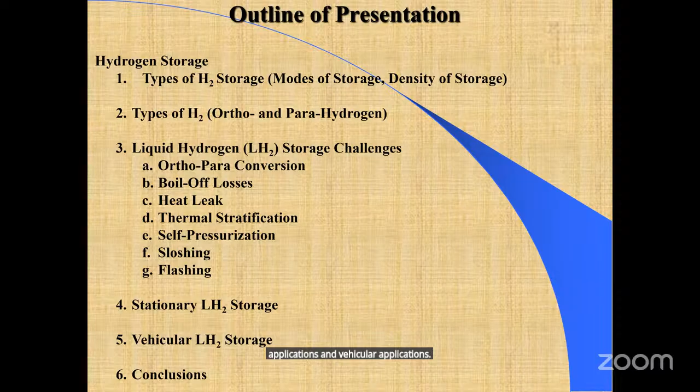First of all, let us discuss the different modes of storage. Hydrogen can be stored either physically or chemically. If you look at the physical storage, you could have it in the form of compressed gas, or in the form of liquid storage, or in the form of cryocompressed storage, which is a form of gaseous storage but under cryogenic temperatures. And then the slush hydrogen would be the last mode of physical storage, which would basically be a combination of liquid and solid, similar to what you get when you have slush lemonade, for example, when you have some lemonade and you sort of get the juice within the ice.

So that would be the slush. In the chemical storage, you've got hydrides, which are of different types. There are the hydrides or metal hydrides, the complex hydrides, and the chemical hydrides, and then the interstitial metal hydrides. These are all different types. The idea of a hydride is basically that it's a solid metal or alloy that can absorb hydrogen or release hydrogen, depending on whether you do cooling or heating. If you heat a metal hydride that has hydrogen in it, or a complex hydride or a chemical hydride - any of those - by heating, they release hydrogen, and by cooling, they absorb hydrogen. And then we go to the other type of chemical storage, which would be either adsorption, liquid organic carriers, reformed organic fuels, or hydrolysis. These are all different types of chemical storage that are not hydrides.

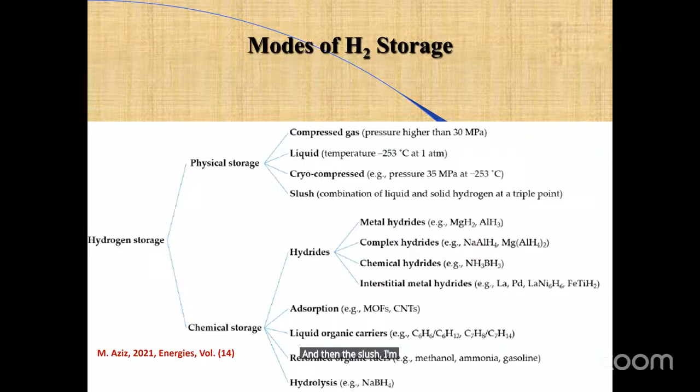Now, I'm going to focus more on the physical storage for this lecture, and predominantly I'm going to focus on the gaseous storage, the liquid storage, the cryocompressed gaseous storage, and then the slush I'm going to talk briefly about. Just to give us an idea of what it is that we're looking for: a large gravimetric density and a large volumetric density.

So depending on which type of storage you're dealing with, you need to be looking at the following numbers. For example, for an underground storage for large volume storage, the volumetric density is not too bad - it's between 5 and 10 kilogram per meter cube. For the cases of pressurized gas storage above ground, in this case the volumetric storage is between 2 and 16. Okay, so again it's a slightly different range - there is an overlap, a little bit of an overlap.

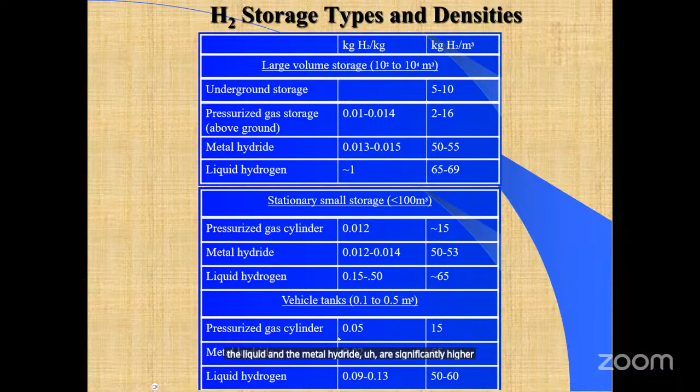On the volumetric side, the liquid and the metal hydride are significantly higher than the pressurized gas cylinder. Now, let us talk about the types of hydrogen that we are dealing with.

There is, as I said, orthohydrogen and parahydrogen. Orthohydrogen, the nuclear spin is in the same direction. You see on the top left part of that slide, the orthohydrogen molecule, which has two atoms in it, where the nucleus is rotating in the same direction. That produces orthohydrogen.

The other one, parahydrogen, has the nuclei rotating in opposite directions. Orthohydrogen is less stable than parahydrogen; it's the more unstable form of hydrogen. Eventually, if you have orthohydrogen over a long period of time, it will transform itself into parahydrogen.

It will also transform itself into parahydrogen in the case of refrigeration. When you cool it, like when you're trying to liquefy hydrogen, during the liquefaction process the orthohydrogen will also convert into parahydrogen. And we want parahydrogen, we do not want orthohydrogen.

Normal hydrogen, available at normal temperature and pressure, is 75% ortho and 25% para. 75% ortho, the bulk of the hydrogen, will be in the ortho mode, and the 25%, a quarter of it, will be in the para mode.

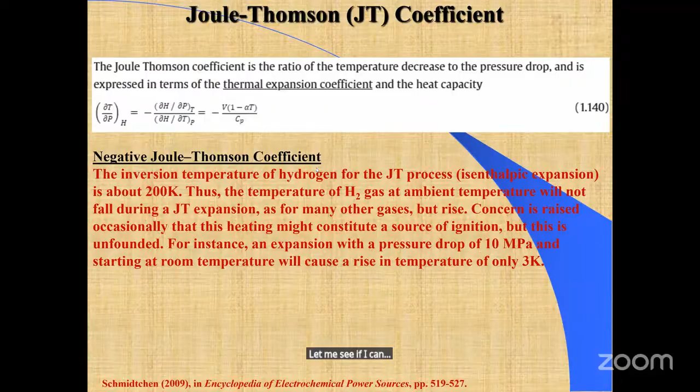If you look at the... let me see if I can... my computer is just taking its precious time here. Let's wait a second. Okay, I moved back too far. Let's go back. Okay, so let's go forward now.

So here the inversion temperature is the temperature at which a gas changes behavior during a Joule-Thomson expansion. Below this temperature, the gas cools upon expansion, while above it, the gas warms up again upon expansion. For the case of hydrogen, this temperature is relatively low, and the temperature rise is relatively low compared to gases like nitrogen and oxygen. The temperature where that happens is about 200 Kelvin, relative to 621 for nitrogen and 764 for oxygen.

So the idea is that hydrogen's low inversion temperature arises from its weak intermolecular forces, which are associated with higher temperatures where repulsive forces dominate during expansion, increasing the kinetic energy and temperature. This makes it lower than the cases for nitrogen and oxygen.

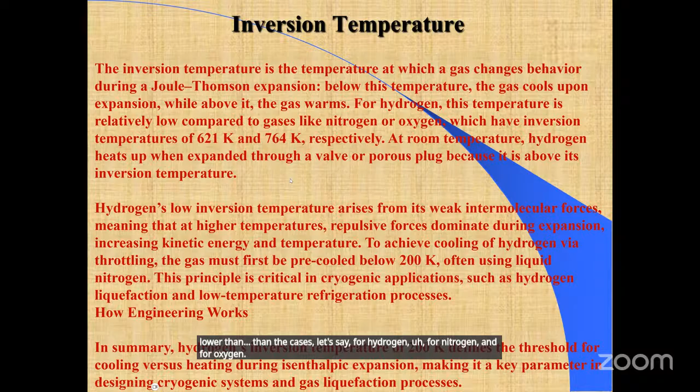It can also raise safety issues, because if your temperature rises, generally speaking, you could reach the ignition temperature, and that could cause problems. But luckily, for the case of hydrogen, an expansion resulting in a pressure drop of 10 megapascal—a good amount of pressure drop—only raises the temperature by about 3 Kelvin, which is not significant enough to worry about.

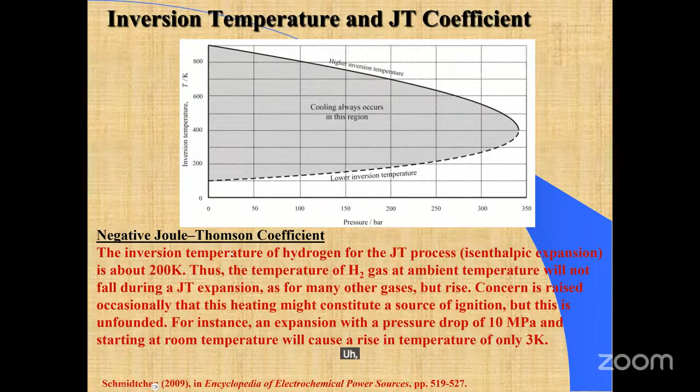Now I'm going to talk about the issues under research right now that are slowing down the process of being able to take advantage of using liquid hydrogen. These are some of the challenges.

The ortho-para conversion, I already talked about that, whereby the process is an exothermic reaction that results in heat release. So that is something we have to find a way to deal with, and of course we use catalytic converters to speed up the process.

The heat leak is another issue, which is when you store liquid hydrogen, any heat transfer from outside is going to result in vaporization of hydrogen, or what we call boil off.

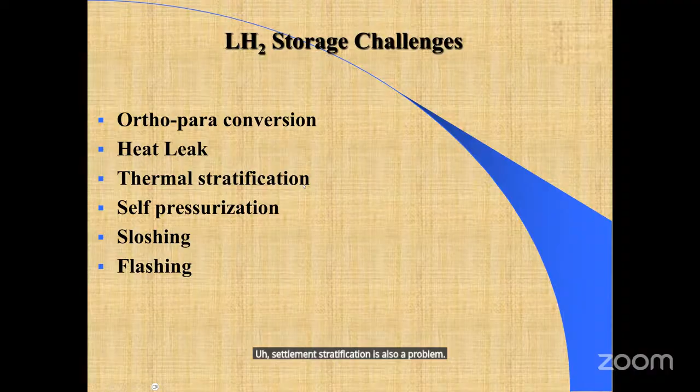Thermal stratification is also a problem. If you look at a liquid hydrogen tank, like the big spherical tank at the NASA Kennedy Space Center with H2 written on it, what happens is the hydrogen gets stratified: in the vicinity of the walls of the container, it would be warmer than in the bulk, in the middle part of the tank. It will also be warmer at the surface of the liquid inside the tank.

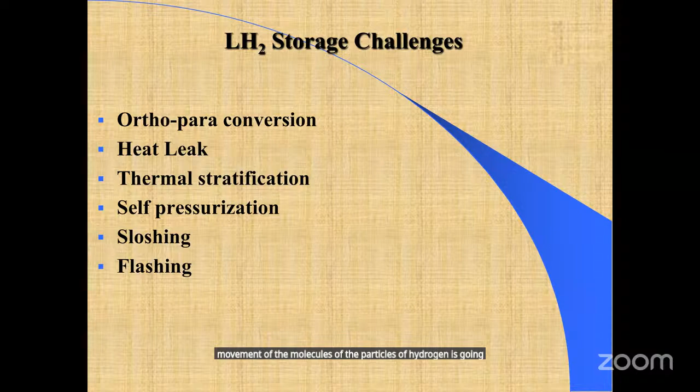There will be convection currents as a result of this thermal stratification, whereby the movement of the hydrogen particles keeps going up and down, because when the temperature goes up, the density goes down, and the hot liquid has a tendency to go up, while the colder liquid has a higher density so it stays at the bottom. But because of the stratification, the movement continues, and that results in overall boil off due to this self-pressurization from the thermal stratification process. So that's also something we need to minimize inside the tank.

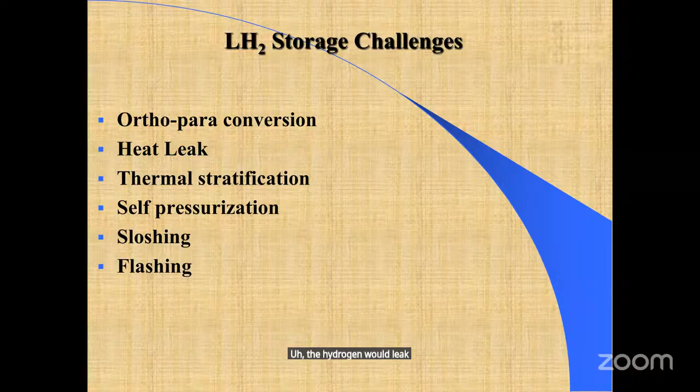Self-pressurization is also a problem, whereby the liquid boils off at the surface, and the amount of hydrogen vapor becomes larger and larger as time progresses. When that happens, the pressure builds up over the surface, and you could get to a point where the hydrogen would leak from the inside of the tank to the outside because of the higher pressure that builds up. So that's also a possible challenge we need to deal with.

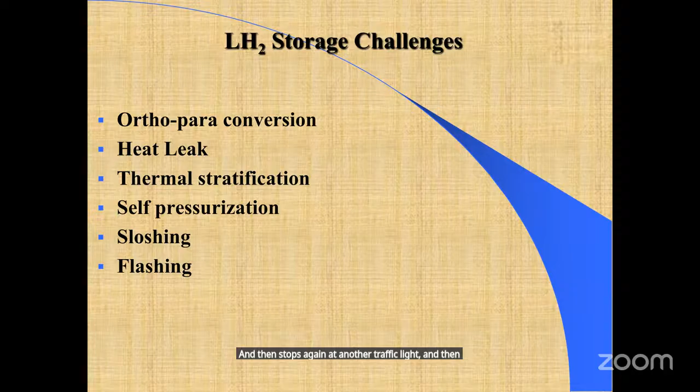Sloshing is when you have liquid hydrogen inside a tanker truck, and the truck stops at a stop sign or traffic light, then moves after the light turns green, then stops again at another traffic light, then moves. What happens is the liquid keeps moving back and forth between the front and end inside that tanker truck, and as it moves it hits the front and the back of the tank.

When it hits the front and back of the tank, the kinetic energy converts into thermal energy, and that thermal energy is also used to vaporize hydrogen. So when the truck is moving, it has a certain kinetic energy, then it stops all of a sudden. The mass times the velocity of that liquid is going to be converted into thermal energy, because you are forcing the liquid to stop. All that energy has to go somewhere, and thermal energy is the most obvious mode of conversion there.

Lastly is flashing. Flashing happens when you are transporting liquid hydrogen from a source—let's say you have a big tank and you want to unload hydrogen from the tank into a tanker truck. In order to do that, the pressure at the source, the stationary tank, has to be slightly higher than the pressure where the hydrogen is going, because in order for the hydrogen to move, it has to move from high pressure to low pressure.

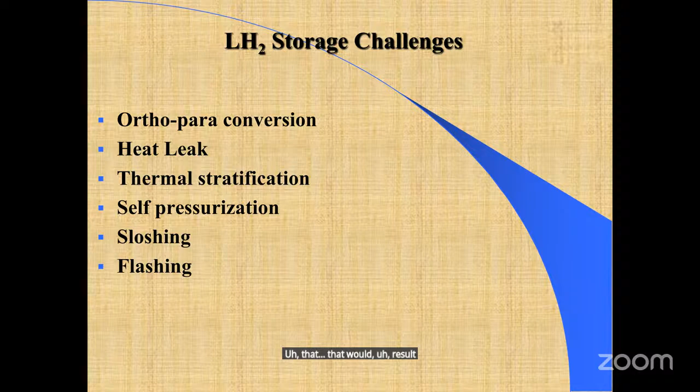If you do it too fast, if you use pumps, for example, to transport hydrogen from the source to the sink, you're going to speed up the process and the flashing effect is going to be more significant. If you do it slower, maybe without pumps, using gravitation or other ways to move the liquid, relying on the pressure difference, that would result in lower losses in terms of the flashing effect.

I'm going to skip these slides since I basically summarized all of that in my conversation here. I'll go to this slide where we have the 5 different types of storage modes, in the form of either gas or liquid. They've labeled them in this particular study by Pizzutilo et al., published in the World Electric Vehicle Journal in 2024.

You have liquid hydrogen, labeled number 1, then subcooled liquid hydrogen, labeled number 2, then cryocompressed hydrogen, labeled number 3, then compressed hydrogen gas at 70 megapascal, labeled number 4, and compressed hydrogen gas at 35 megapascal, category number 5. On a pressure-density diagram, you can see where every case exists.

What we want is to be at the very bottom and at the extreme right side of this figure. The more to the right and the lower we are, the better off we are. If you look at the extreme right corner of that frame, you'll see that number 1, liquid hydrogen, is the big winner, as we all expected. Why? Because it has high density at low pressure, and high density at low pressure is good.

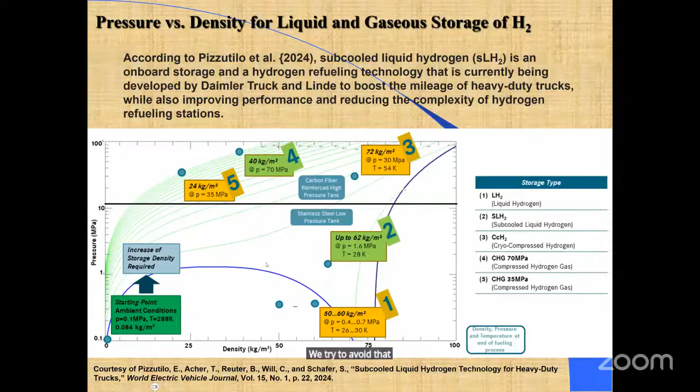Here, if you look at the subcooled liquid hydrogen fueling process described in this slide, it's showing the subcooled liquid hydrogen truck on the left, the liquid hydrogen tank in the middle, and the liquid hydrogen trailer on the right side. This gives you an idea of what is involved, giving you, let's say, 400 to 500 kilogram per hour in the case of filling. The fueling time will take about 10 to 15 minutes. The energy demand is given in terms of kilowatt hour per kilogram of hydrogen dispensed.

0.05 is really not too bad. The station footprint is going to be about 50 meters square of surface area without the dispenser, and the storage tank size we're looking at is about 4,000 kilogram of liquid hydrogen in 10 hours of fueling. The fueling modes are parallel and back to back in this particular study. This is published in the World Electric Vehicle Journal in 2024, and you got the reference here - you could read the paper if you want to.

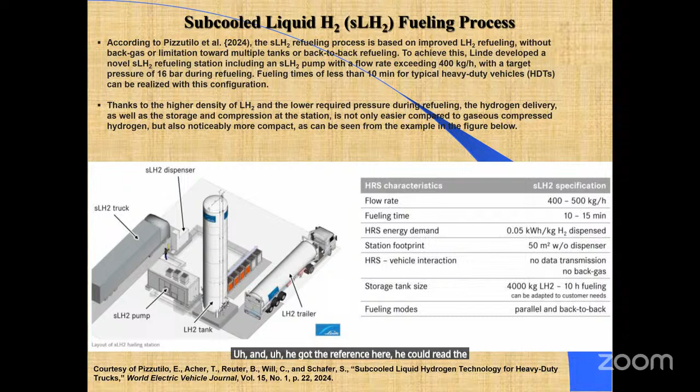This is another slide showing, on the left-hand side, the flow, pressure, and temperature profiles during the subcooled liquid hydrogen fueling process. The right-hand side is showing the pressure-temperature plot of hydrogen in general, whereby you look at the pressure-temperature relationship. Here you're going to see all the different zones: the solid zone, the liquid zone, the vapor zone, and then the supercritical zone.

By the way, I just wanted to emphasize a point - this is the difference between a vapor and a gas. Sometimes we talk about vapor hydrogen, sometimes we talk about gaseous hydrogen, and this is not a trivial distinction, it's an important distinction. Gaseous hydrogen technically exists in the supercritical zone - it only exists in supercritical conditions, meaning the pressure of gaseous hydrogen has to be larger than the critical pressure of hydrogen. If you are larger than the critical pressure of hydrogen, you are gas and not vapor.

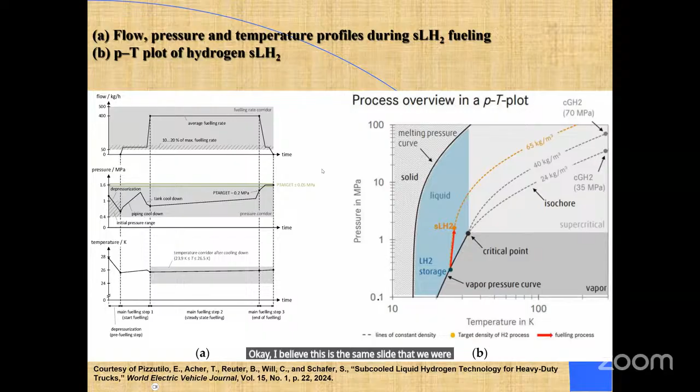That's the study done by Argonne National Lab on onboard cryogenic hydrogen storage. I would like to touch base briefly with you on this, because they did really some fantastic work in terms of heavy-duty vehicles in particular. This was presented at a hydrogen workshop in 2024, and here they looked at different scenarios for vehicular storage.

Here they're showing you, for example, on the left-hand side, the loading at the terminal. You've got the storage tank, like a spherical tank, and then you're taking liquid hydrogen from it and putting it into the trailer. So this is the loading at the terminal, and then you have the back to the terminal. You can see where the line is coming from the tank to the trailer through the fill valve, and then the vent valve. The vent valve is designed to relieve the pressure as needed, and that also is part of the safety precautions that need to be taken.

Just to give some numbers and put some perspective here, you're looking at about a 64,000 liter loading trailer at the terminal. The pressure transfer from the terminal is 24 psi, that's about 1.6 atmosphere, to the trailer. The trailer is at 20 to 22 psi. Again, no surprise there, the pressure at the trailer is less than the pressure at the tank in order for the transfer to occur. 600 kilograms per hour is what you're looking at.

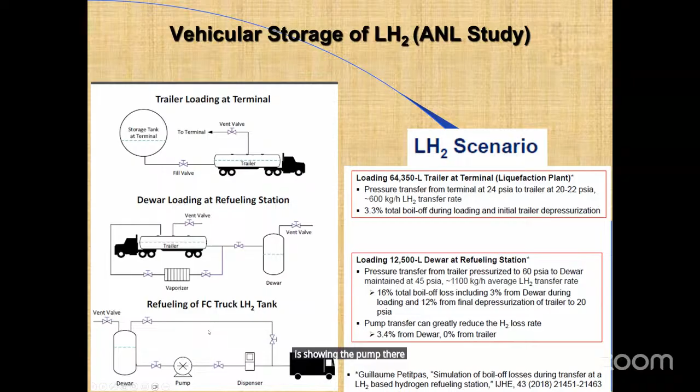And then the last diagram you can see at the bottom here, that's the refueling of the truck to the tank. So you've got it showing using the pump - it's showing the pump there to accelerate the process.

This is another slide showing, particularly for heavy duty trucks, they again looked at liquid hydrogen, which they called liquid hydrogen 1 and liquid hydrogen 2. Liquid hydrogen 1 is with onboard pump, and liquid hydrogen 2 is without the pump. Then you have the cryocompressed hydrogen, that's case number 3, and the subcooled liquid hydrogen, which is case number 4.

Okay, and they're showing you the diagrams, the plan of what is involved here, looking from the top, of what is involved and who is giving hydrogen to whom, type thing. And then it's showing you the availability of different pieces of equipment.

For example, here you've got an onboard pump available only in the liquid hydrogen 1, and there is an in-tank heat exchanger - it's available in all of them except the liquid hydrogen 1.

And then you're looking at the different values of the pressure, the operating pressure, the allowable heat gain, and the minimum dormancy, again giving you the numbers for every one of those cases. Every one of those, by the way, has a reference, and it's given by them at the bottom here.

They published this work in the International Journal of Hydrogen Energy. I believe 3 of those are published in International Journal of Hydrogen Energy, 2023, 2023, and 2018. And then there is one published, or presented, in the CEP Heavy Duty Event in 2021.

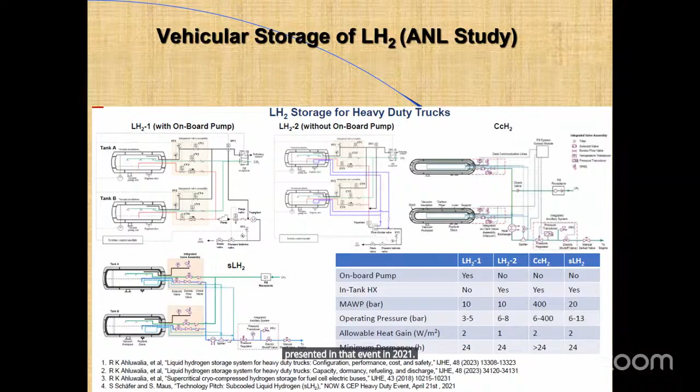This is the vehicular storage, the usable storage density, again giving you what it is for every case. You can see, of course, the density for the 700 bar, or the so-called 70 megapascal - it's about 700 bar, 1 bar is 1 atmosphere - so basically about 700 atmosphere versus 350 atmosphere for the compressed hydrogen.

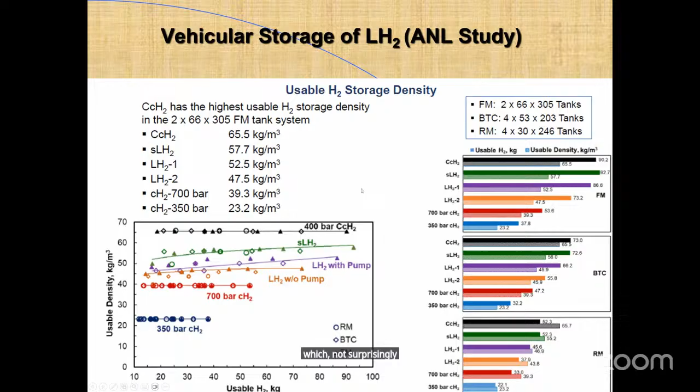And then for the subcooled hydrogen, the cryo-compressed hydrogen, and for the liquid hydrogen 1 and liquid hydrogen 2, with and without the pump, it's giving you the density, the usable density. All of them are very impressive. Of course, the gaseous are the lowest, not surprisingly. So then they're plotted in the diagram below.

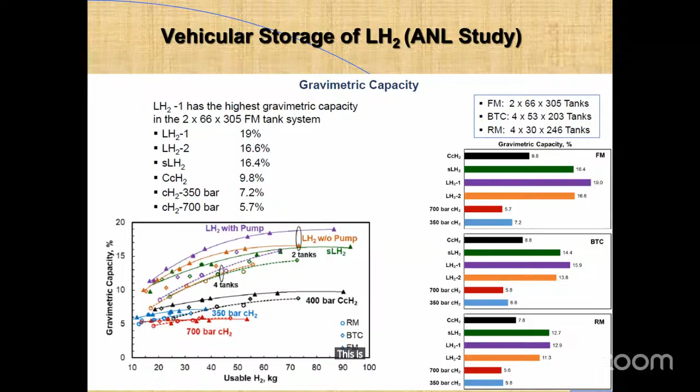Here is the gravimetric capacity, again for every case: 19% and 16.6% for the 2 cases of liquid hydrogen. For the subcooled liquid hydrogen, 16.4%; the cryocompressed 9.8%; the compressed hydrogen at 35 megapascal is 7.2%; and then at 700 is 5.7%. This is the gravimetric density, the gravimetric capacity for every case.

And then the volumetric capacity is given here in terms of grams of hydrogen per liter - more like kilograms of hydrogen per meter cubed. Similar numbers.

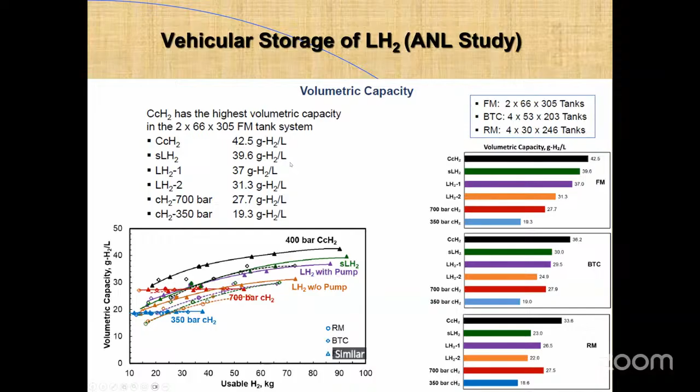And then the cost, which is of course, in the end, a very important factor to consider. You're looking at the cost, and here the way they presented the cost is for every one of those cases, they gave you the total cost per kilowatt hour. They gave you the cost of the carbon fiber composite percentage, the liner percentage, the system testing percentage, the vacuum insulation percentage, the outer shell percentage, and the housing support and assembly percentage. All of those are broken down in terms of dollars.

So, for example, if you take the compressed hydrogen case at 350 bars, you're looking at $12.66 total cost, and then 3.4% for the liner - 77% for the carbon composite, 3.4% for the liner, 0.7% for the system testing, and so forth. Some of those other things don't cost anything, like vacuum insulation and outer shell - they're so small that they're not written for the compressed hydrogen.

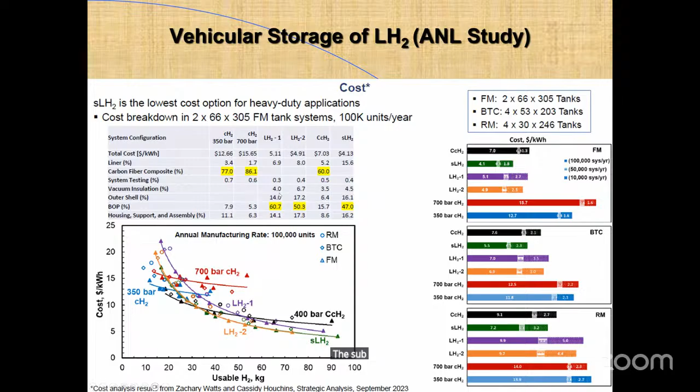But then they have values for the liquid hydrogen 1 and liquid hydrogen 2, the cryocompressed and the subcooled liquid hydrogen. They have values that are not zero.

And then here, the future outlook, this is I think the last slide. The future outlook indicates that cryocompressed and subcooled liquid hydrogen are attractive onboard hydrogen storage options for heavy-duty trucks if the fuel cell system accepts hydrogen delivered at 5 bars. The cryocompressed is the only viable liquid storage option if the fuel cell system requires hydrogen delivered above 15 bars. The low-pressure liquid hydrogen storage becomes competitive if onboard boost pumps capable of delivering 16 kilogram per hour of hydrogen at 5 to 15 bars pressure are developed.

The stationary pumps are capable of transferring liquid hydrogen from the trailer at 1100 kilogram per hour and providing 5 bar of pressure, which can greatly reduce hydrogen losses during Dewar loading. A future study to assess the potential of eliminating hydrogen loss from the Dewar with the cryocooler is actually needed. So those are all the summary of the study.

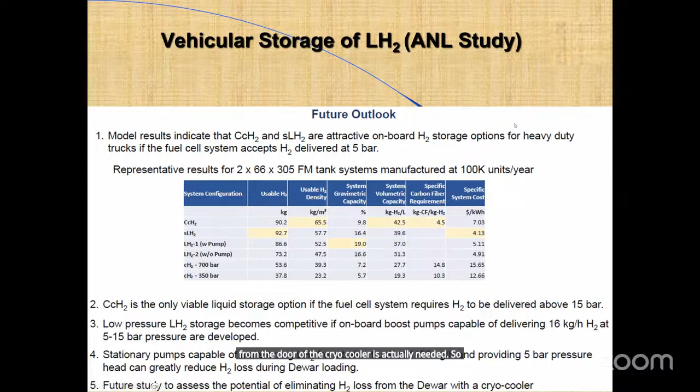If you combine higher pressure and low temperature, you could get to 72 kilogram per meter cube. The storage technologies of cryocompressed hydrogen are more complex, and they are currently at a lower technology readiness level. Although a friend of mine who used to work at Pacific Northwest National Lab is working on cryocompressed hydrogen, and he continues to pursue the technology.

Today the compressed hydrogen at 700 and 350 bars are used in light duty vehicles and for buses. So with this, I conclude my presentation. I'll be happy to answer your questions. Thank you very much.

Thank you very, very, very much, sir, for such a wonderful ride of knowledge. I'm sure it's the same for every one of the listeners here today. We have all learned a lot from this presentation.

From the last presentation, we were thinking about hydrogen types only in terms of the source of production, categorizing them by color: brown hydrogen from fuel like refineries, blue hydrogen, and green hydrogen. Now today we are learning it in terms of the ortho-para dynamics, understanding the conversion from ortho to para and the need for it to exist in para form. Such an incredible ride of knowledge. And then the storage forms, the liquid, the compressed gas, and the subcooled liquid, is a wonderful unraveling of knowledge from you, sir. We are very, very appreciative of it.